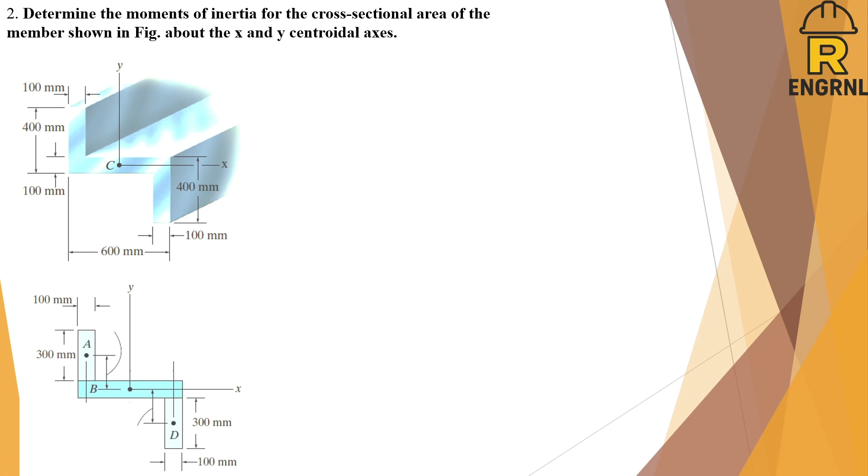Like what we did with the rectangle, we got its own moment of inertia at the centroids. This time, it's composite areas. So let's make a neater cross-sectional area. Here it is. Let's call this part area A, area B is the one in the middle, and then area D. So by observation, there are its dimensions per area.

So area B is 600 by 100. Now you'll see that the 300 by 100 area is area A, and area D is the same. So it's symmetrical about the y-axis. And if you also notice, the centroid of area B is right on the x-axis. That will mean something later.

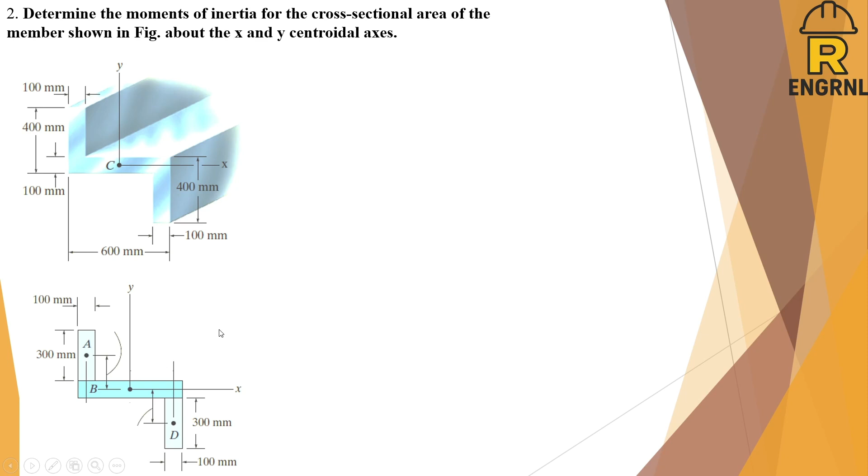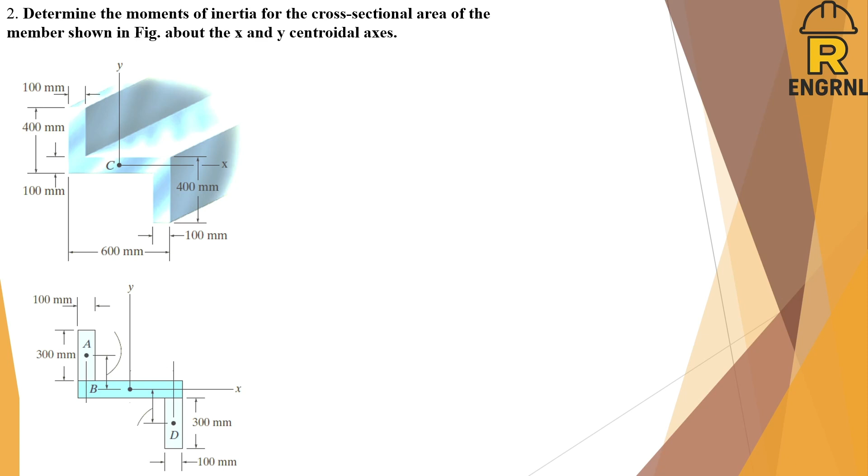So we'll use the parallel axis theorem that we studied in the concept; you can go back to the previous video. Let me start with the centroidal axis x. We'll use the parallel axis theorem formula or transfer formula. So Ix is equal to the centroidal x-axis moment of inertia plus the area times d, or moment arm, squared.

A table again to make it easier. Suppose your area 1 is A, and the area of A is 300 times 100. We have 30,000. Sorry, that should be mm squared, just a typo. Now we need to get the centroidal moment of inertia of that rectangle, and that is BH cube over 12. Remember, for a rectangle it's BH cube over 12.

So, calculator. Its base is 100 and its height is 300, cubed over 12. BH cube over 12 when we're getting Ix. Right? So we have 2.25, or should I say 225 million. Right? 225 million.

Now get the centroidal distance, or the moment arm from the center of that rectangle down to the axis of rotation, which is the x-axis. Let's measure it. That is 200 mm, because this is 150, half of rectangle A, and from here is half of 100, which is 50.

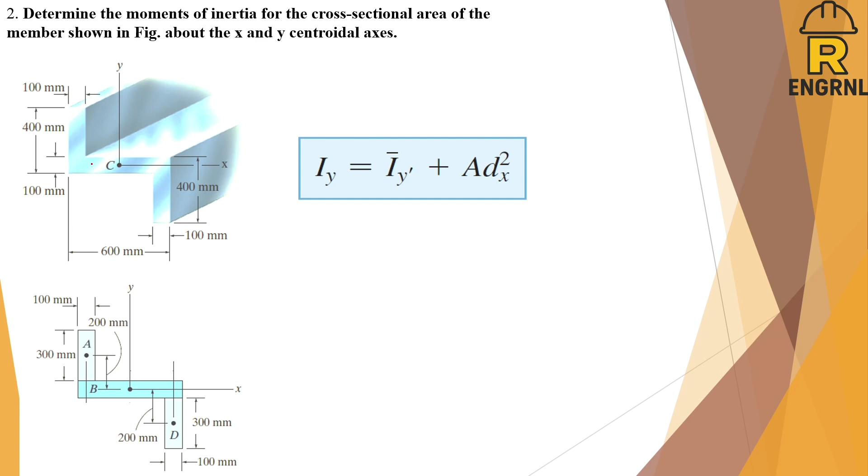Next, let's get Iy. This time our reference is the y-axis, which is at the centroid of this Z shape. But we'll still go area by area using this table. Again, a typo here, that's mm squared. This is Iy bar, and then Iy is what we'll get. Let's start again with A1, A.

This time its area is still 30,000. But its Iy bar is not the same, because when we talk about the y-axis it's no longer BH cube over 12, but B cube H over 12. So B is 100 cubed, and H is 300, over 12. We have 25 million.

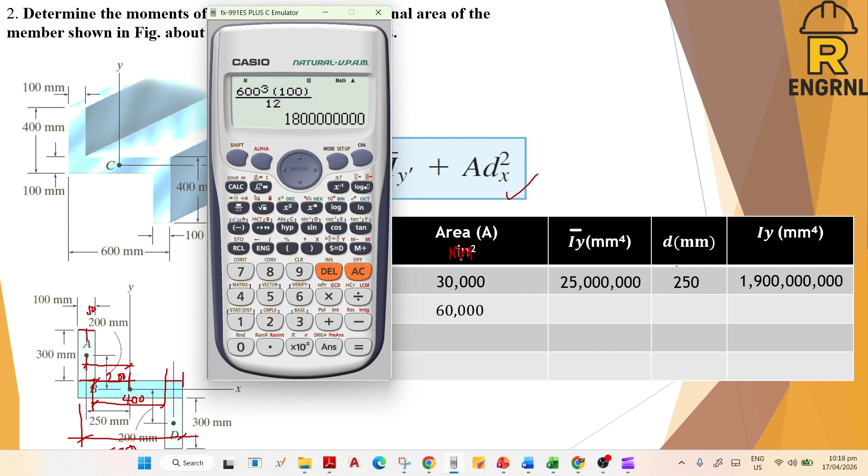Again, for section B, or area B, the area is still 60,000, 600 times 100. And its inertia is now B cube H over 12. Its base is 600, its height is 100. So we have 1.8, or 1,800 million, or 1.8 billion.